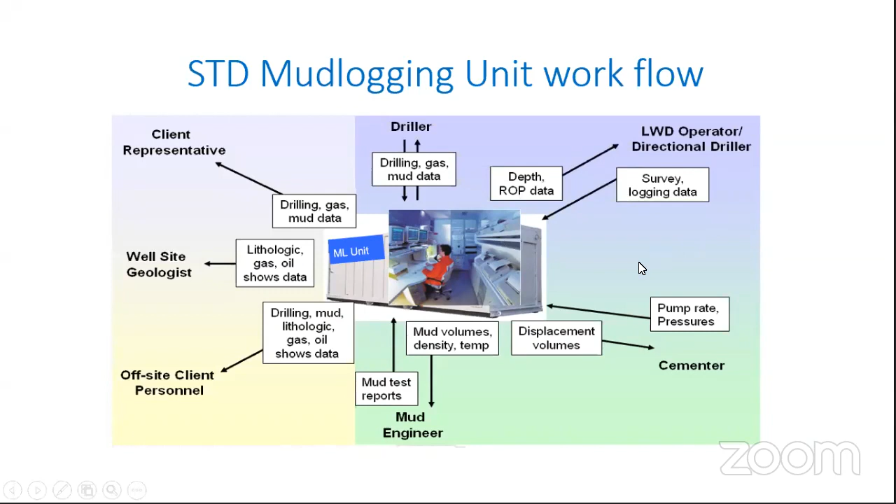Another one, as I mentioned, this is just a diagram. This is the mud logging unit. Mud logging basically deals with all the service hands, all the departments at the rig site. There's usually a client representative, the company man, and the geologist. Then on the rig floor, the driller, MWD, LWD, and so on. This is where the recording of data happens, like the control room. You can say this is the NASA of the rig site.

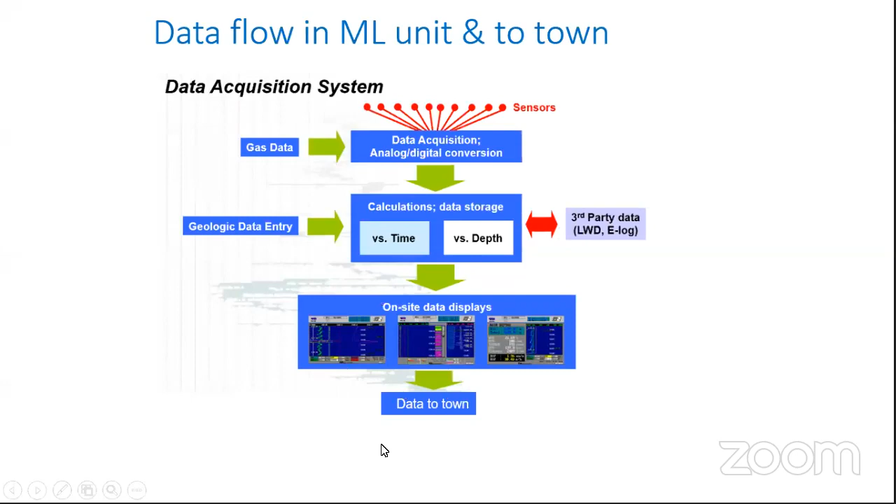Again, this is just an example of how the acquisition system works. Many sensors are there, the gas data is there, the entry and analysis entry, and these displays are there. Then there's import of the LWD data from the LWD guys and vice versa, and finally the logs or data can be transmitted to town.

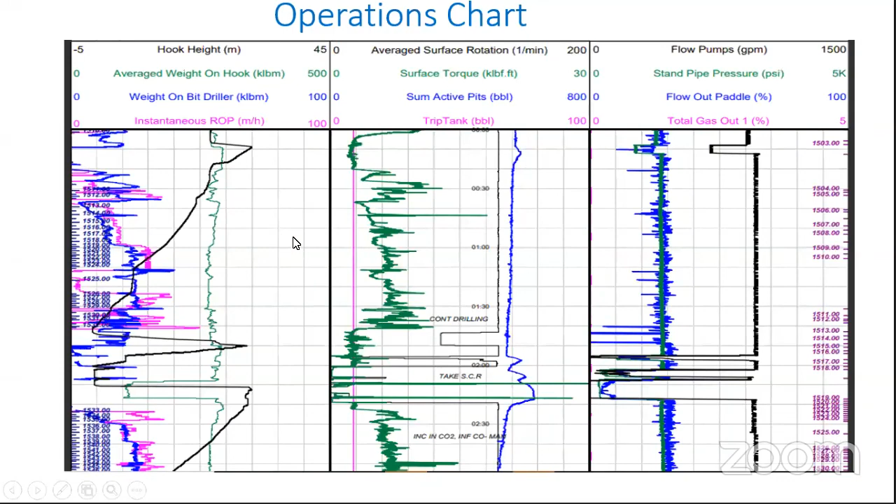You can say, for example, how many minutes did the driller take to make a connection. Was there any problem, all the parameters - this is in brief, all these logs, this non-editable chart, which is very, very important and very reliable. Still, this is the basic. So why do we think, or why do we say that mud logging is important?

I'm sure most of you must have seen the movie Deepwater Horizon. So this incident: what happened is that this was the Transocean rig named Deepwater Horizon, and it was drilling a well in the Gulf of Mexico. It was in 2010 that it had a blowout. Can you imagine this? This incident changed the oil and gas regulations to a big, big uncertainty.

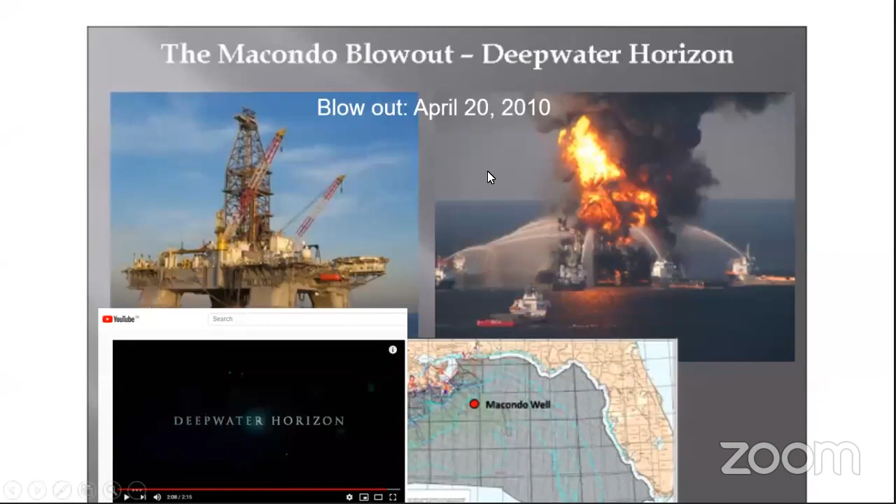So why, what happened? I am sure you must have read it, and you must have seen the movie also. If not, there is a full report on this one. You can download it. It's 126 pages.

One small example I would like to pull out from this is that during the investigation, it was found and concluded that there was a simultaneous operation of mud transfer and other operations. At 1:28 p.m. on 20th of April, the mud loggers told the driller that because of this simultaneous operation, they had difficulty monitoring the pits. So the assistant driller told the mud logger that once the offloading operation ceased, a notice would be provided, which was not actually done in the latter part.

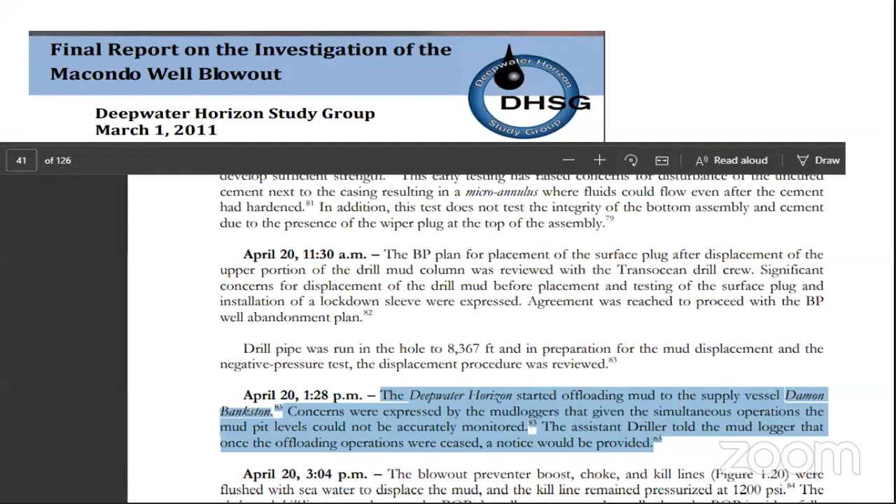So this is just an example of how communication is very, very important - first of all. Second thing is very close monitoring. I'm not saying this was the only reason; there were multiple reasons, but this was also one of the important findings - how important and crucial it is in monitoring a well. And you know the consequences in terms of BP, Transocean, and the environment, and the concern to the world.

So now coming to the advanced application - it will be very difficult to cover all, but here I'm going to pick three cases, only three cases, by using the advanced application, of how we can optimize operation, how important it is. So the first one, I have selected an SPE case.

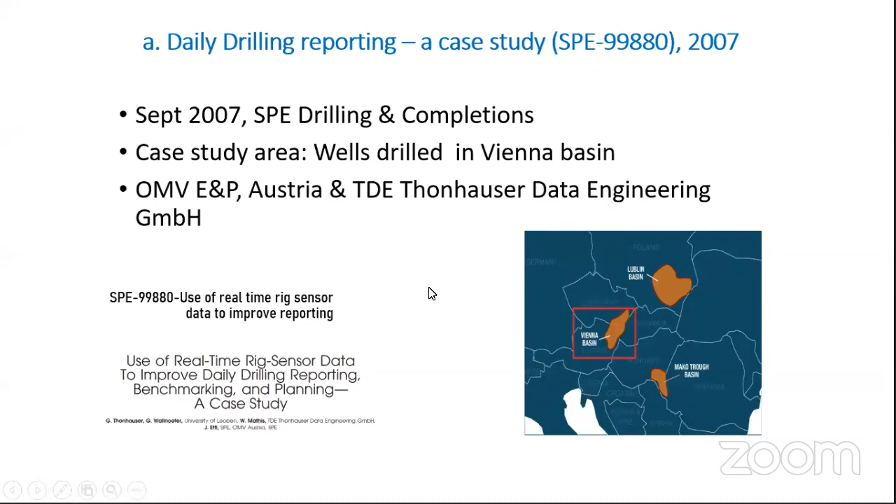This is SPE. Some drilling guys took some wells in the Vienna basin. They did some survey, some studies. So what happened is, if you see the timeline of a well as it's recorded - this is the theoretical. And when we talk about lost time, there are some downtimes as we go with the operations, and there are some lost times, but there are some invisible lost times.

So what happens is, once a well is drilled in a particular block, and after a few years down the line, if the drilling engineers or geologists want to refer to a well to plan another one, they need to see that data. At that time - I'm talking about 2007 or so - it was very difficult to find, and it took days and months and a lot of time because it was not readily available, not easy to refer to, and was not very accurate. I will not go into the very detail, but this is just to give you an idea: what is this invisible lost time, and how can we rectify this?

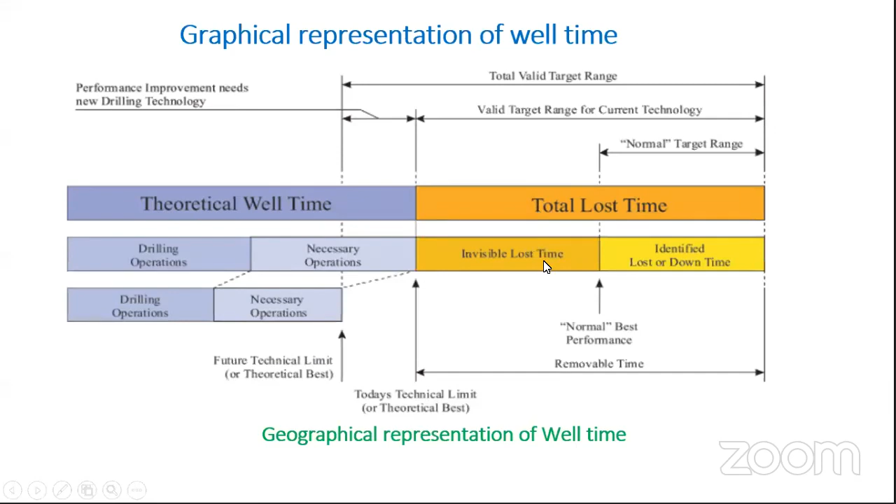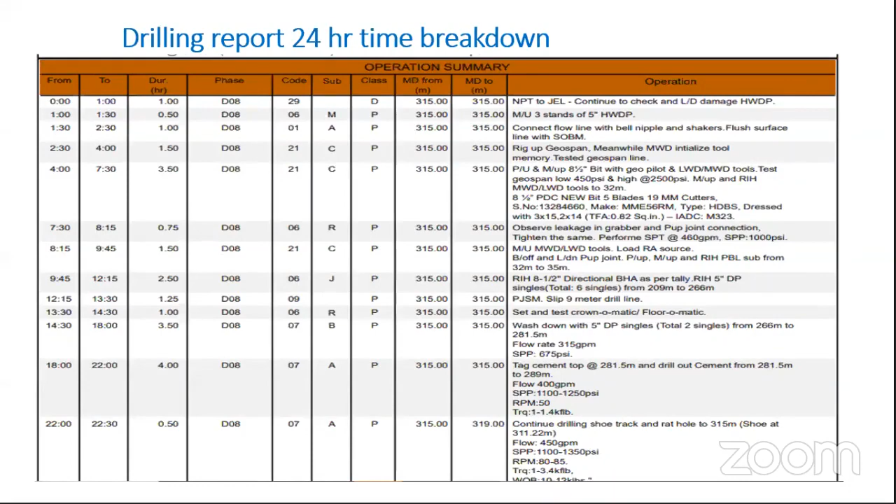For example, the driller finishes an operation, let's say at 10:10. He will not write 10:10 - he will write 10:15, or sometimes 10 o'clock. So if you think about a well drilled over a few months, the error will be very, very much, right? This is one thing which is still practiced today.

Then, what these guys did - this is the real example of the Vienna case - is they started this automated operation recognition system. And I think now many of the logging companies have already applied and implemented this.

From the signals, that is from the traces, the system can identify whether it is drilling, whether it is reaming, whether it is just circulation, from the different parameters which are required to call it drilling.

For example, for drilling, the bit depth has to be at the bottom. So like that, we'll not go into the details. So this is how it is.

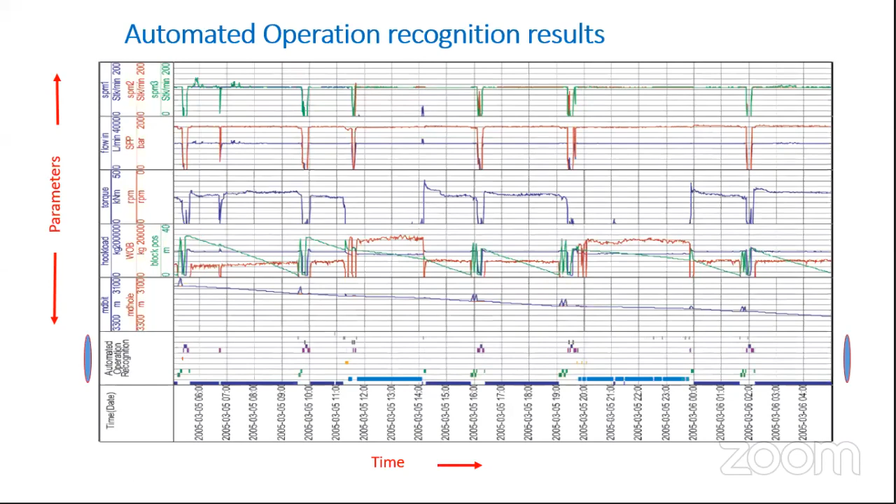It started taking into serious consideration that something has to be done so that all this will be correctly recorded, and then the data will be able to be digitized and used at the same time for future reference. So after that, drilling engineers prepare this at the end of the well.

So if you prepare it based on that 15 minutes, 15 minutes, how much do you think will be the accuracy of this? No doubt they are preparing it, but then what will be the accuracy of it?

So if you prepare from the system generated, which many companies, some companies are doing that. I'm not saying all, but some companies are already doing that.

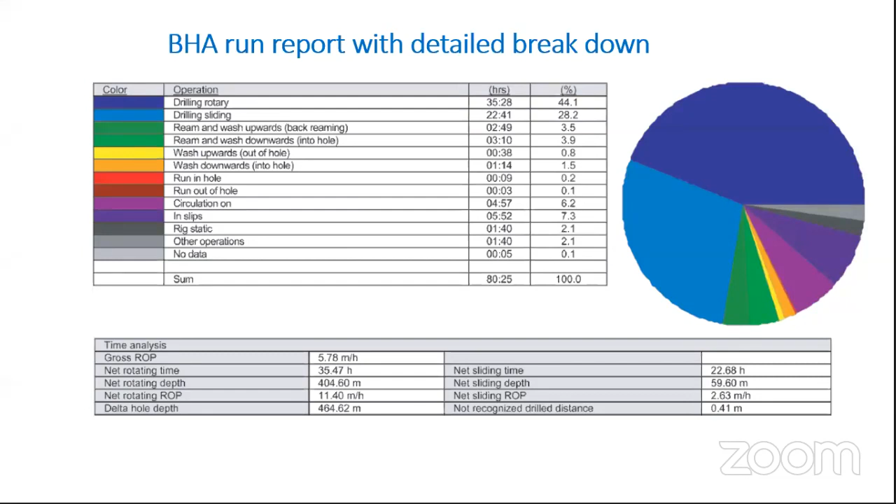So you can say the accuracy is much more in such cases if you use the traces. Of course, it has to be with good calibration. All the parameters have to be QC'd and so on.

So benchmarking is what the guys in Vienna did. After that, you can check so many wells. They did it, I think, around 15, 16 wells, and then they came up with the benchmarking. Then they could do the KPI and so on.

So it helps to improve the efficiency, and overall, at the end, it's cost saving. So this is one example which I wanted to give about this, about how automation will help rather than using the traditional way of reporting the drilling everyday report.

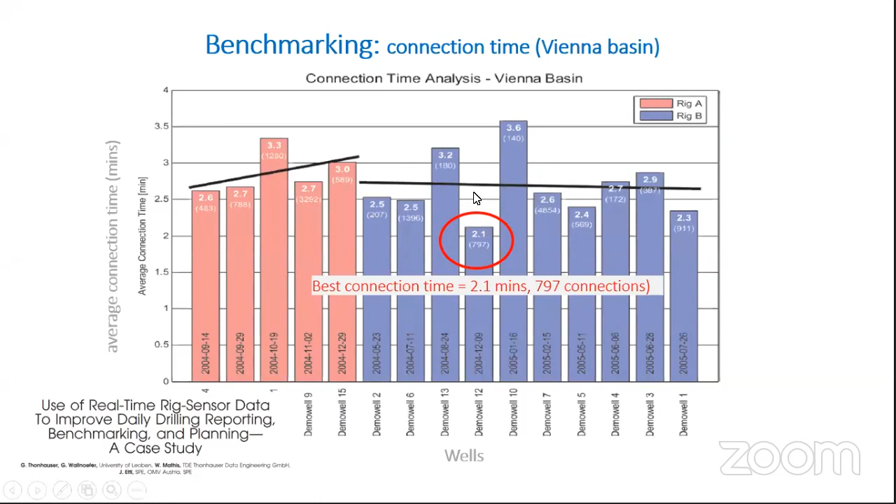So the second one I'm picking up is about the plot of LOT, leak off test, or the FIT, formation integrity test. I will not go into the very detail. The thing which I wanted to highlight is until today, many drilling supervisors, many companies are still using this very, very old way of plotting in Excel.

So you can see here how much volume has been pumped, and what was the pressure, surface pressure. I'm not saying again it is manipulation, but there can be so many human errors. This is still there, which can be improved.

Let's see this one. Okay, I was in this well as well as in this one. So as I have said, I am going to pick up three examples. One is from the SPE, one is from...

...the well I worked on. So before the LOT, what we used to do, by the way, this was for a well in the Gulf of Mexico. This was for Chevron, and I was in the Chevron office. So we used to monitor this in real time. In real time, when the operation was going on, we had 24/7 coverage. At night, we were monitoring from our office, and during that time we were in the Chevron Houston office. So as the operation was going on, we had to submit this report within an hour.

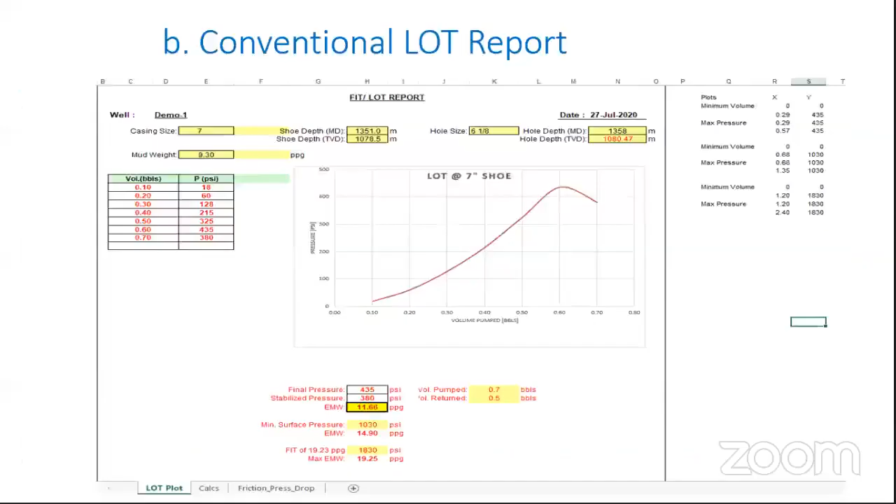Otherwise, they can get it through other methods also and plot the same. So what I'm trying to say is, the above plot, with a little more effort, the mud logging crew also can plot this.

So here I'm not going to talk about the contract, but you can see the difference in the quality of these two plots, the reliability, and different sensors. It doesn't mean that it will be the same number.

For example, in this case, we recorded 1202 psi. The company man reported 1207. It's just 5 psi different, which is okay. It does not have to be necessarily exactly the same with the company man. Of course, to avoid confusion, we do not follow too many. But then whoever reads this chart, they will be able to understand that these are based on different sensors probably, and then the recording. But the reliability is there.

So nobody can finger in this data. So this is what I was trying to say, emphasize at the second point: how this advanced application can help in getting the real value of the LOT or the FIT when done.

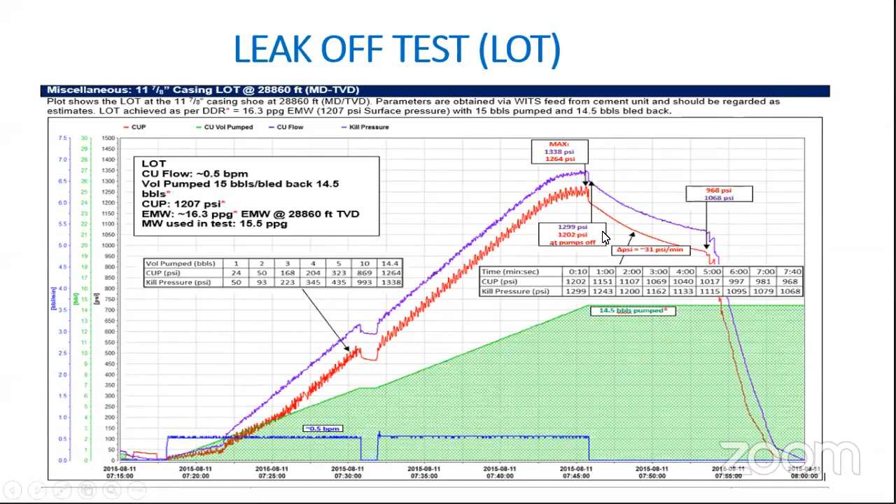The third point I'm going to pick up is about torque and drag. So while tripping, while maybe running in hole or pulling out or doing drilling, this is also one example where I was there myself. This was in one of the wells in Malaysia.

Oh my God, you see the parameters that the driller is doing. He's taking so many parameters, and you can see below. I'll show you the chart in the next slide. There are so many.

So from here, what is he able to see? What does he know actually? He cannot interpret this. There's no time. He's so busy on the rig floor and so many parameters to take. And still, this is being practiced.

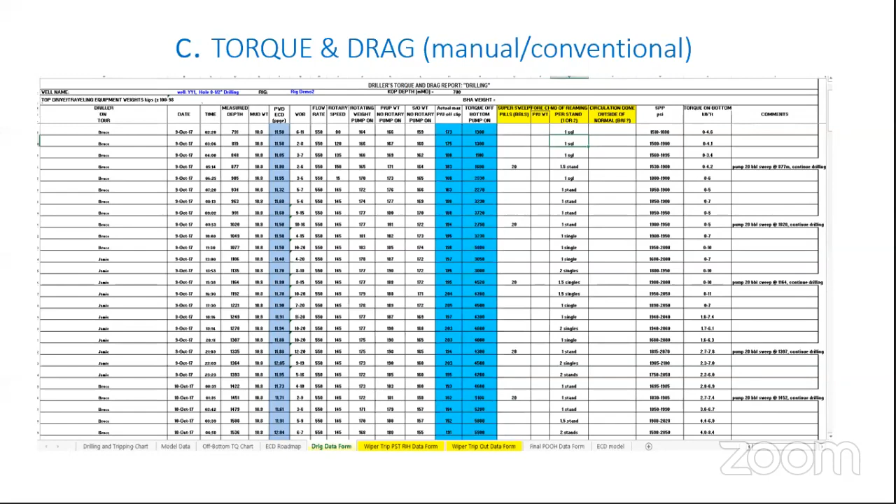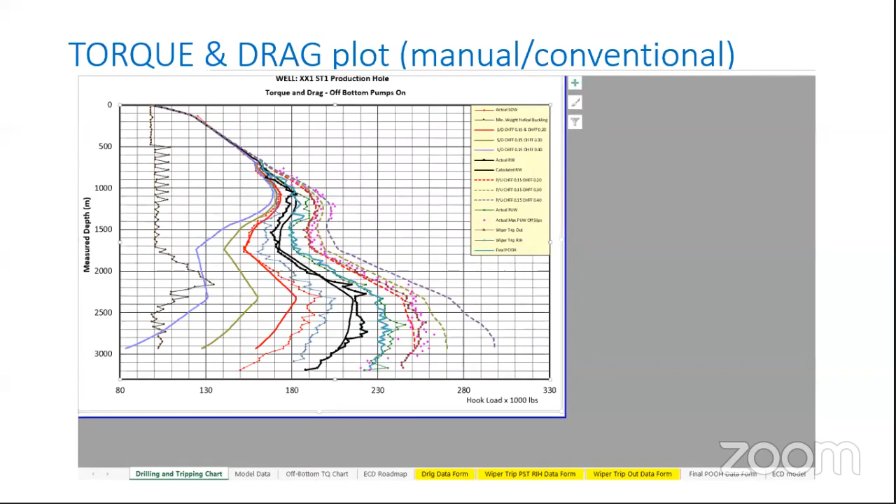The guy is, after plotting, this is one example. You get so many plots, everything in one. Of course, you can separate this into different operations, running in or pulling out of hole. So this is manually done by the basic mud logging crew or by the drilling, or even by the company man.

Before this, we will not go into the details, but the model has to be prepared. The friction factor has to be discussed, seen while running it, and validated. So with this, you will have a very good view, and the speed is there.

The best part is that no data is entered manually. That is the difference. No data is entered manually. So it gives you a very good picture. And you can zoom in, out, and do a lot of analysis.

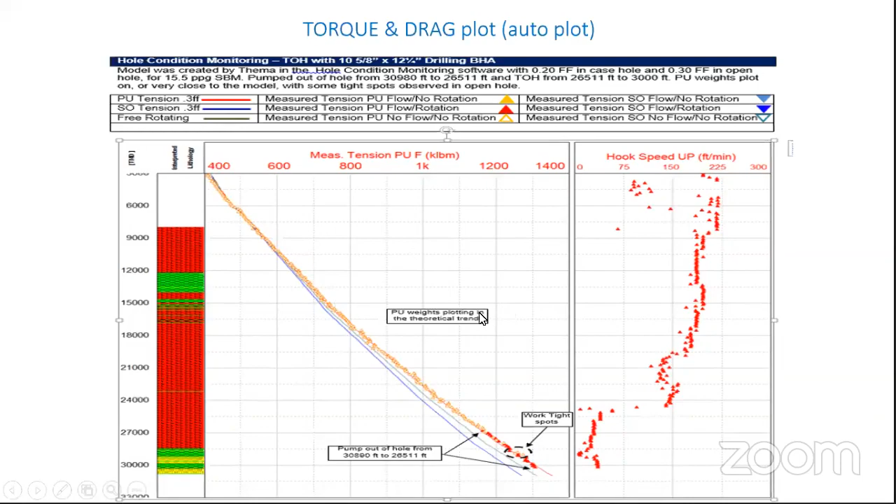For example, you see here, wherever there is a tight spot, instead of saying - and practically, we have seen when we pull out, we got like 40 kilopounds - okay, let us report only up to 30. I'm saying too much, but this is the reality happening.

So if we send a report like this, if something is wrong, before it is too late, there is time to look into it by the drilling guys in town. Oh, the hole is really in bad shape - okay, so there is time to look into it. All this is possible if we make proper use of this advanced system.

The sensor is the same sensor which will pick the same traces or signals, but it's the way it is being analyzed. Before we go into stuck pipe and losing the well, how many wells are still being lost because of negligence or lack of close monitoring or analysis. Some are still following the old, cowboy style of drilling or operation. Today the technology has changed, and it's time we have to look into it.

But of course, there are some companies doing it by interacting with them. Many a time it goes to town only, and not many people refer to the reports. Decisions are taken at the well site without much looking into it. I'm just giving an example, but this can still be improved by using this technology. So this was a very brief three cases I picked up from the drilling point of view or the monitoring point of view.

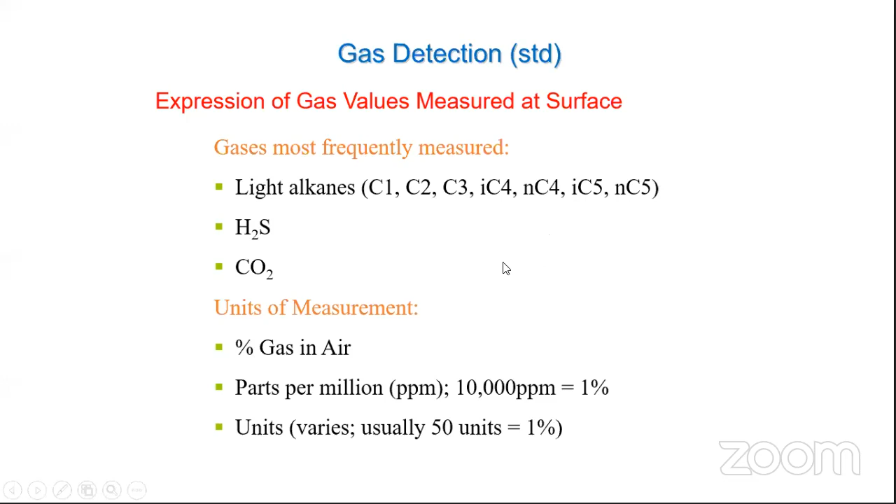But like I said, this is just another point, but you don't have to remember all this. There's no application for it anywhere - you just need to know from C1. When we say C1, this is CH4 actually, this is the alkane, a single bond - methane, ethane, and propane.

C4 is butane, has iso and normal, and the same thing with pentane, iso and normal. All the calibration gases come with exactly what's there, known ppm - you just have to use that one. There's nowhere you're going to describe all this.

So that's easy. Another important thing - not everyone is fully aware of the types of gas. It's very important that when we drill, when gas is produced and detected, whatever reading is coming, we need to understand it from the plot. Of course it's not very easy for beginners, but we need to understand that, because there are some critical types which we have to be very careful about - for example, the connection gas. It's very important, I'll briefly go through it as you can read yourself also.

Liberated gas means when we're drilling a hydrocarbon bearing formation, if there is a gas trap in that reservoir, it will be naturally liberated. That means it will come out with the cutting, and the drilling fluid or mud will bring it to the surface. That is what we call liberated gas, meaning it is coming from the cuttings of the virgin rock drilled.

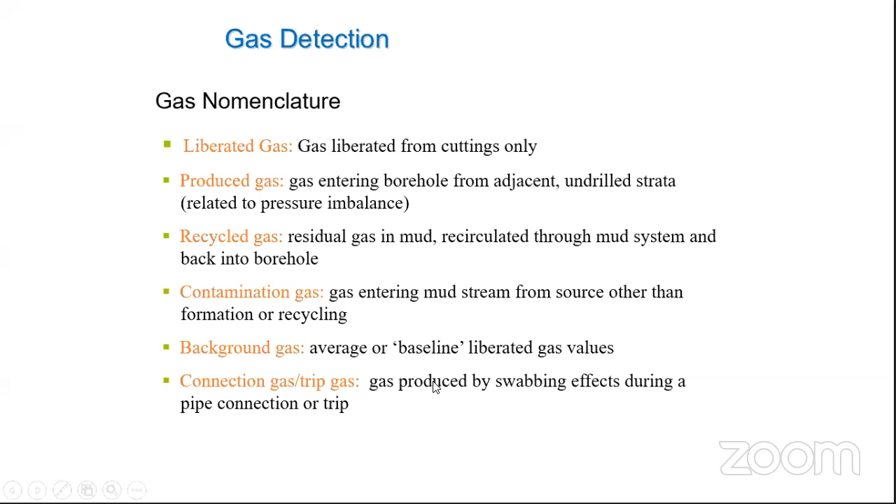Connection gas happens when the formation pressure is slightly more than the hydrostatic pressure. There is one signal we have to be careful of, and this is also because of the swabbing effect. Connection gas is very important for mud logging and geologists to monitor. If it happens and keeps increasing, it gives you a signal to check your mud weight, check your ECDs, and so on. Knowing all these terms will help in managing and identifying the gas.

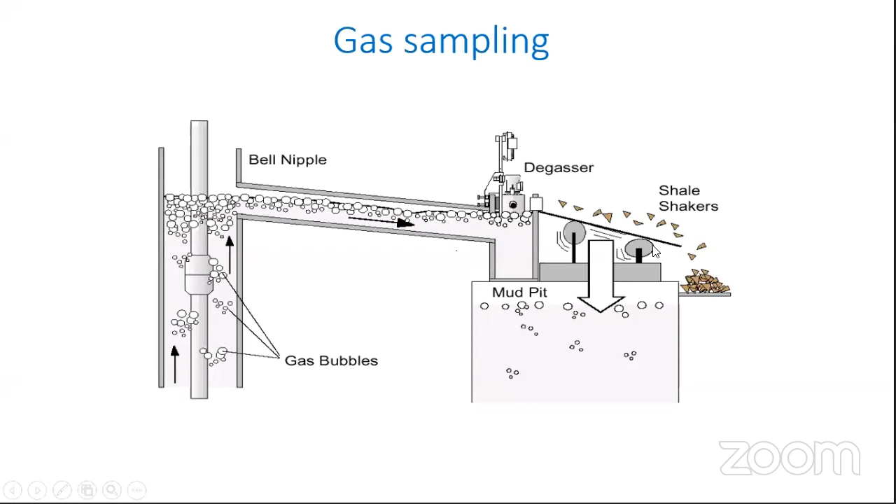Another very important thing - when we say a percentage of total gas, maybe 5%, 10%, 1%, 2%, that doesn't mean anything by itself. What we need to see is what size of cuttings it's coming from. There are many factors - in this case it's the same gas, but a bigger hole size, even with the same formation, means if more volume is drilled, more gas is liberated. It's a very simple example.

Smaller hole size, with the same formation, means we are expecting less gas. Why? Because we are drilling less rock volume. This is a very simple but important example: the same amount of gas per unit volume of rock, but different bit size can change the total gas reading. As you see here, going from 17.5 to 6 inch, see how it comes down.

Another factor is the flow rate. If you dilute it in a higher volume, the gas reading will definitely be less. So increasing the mud flow rate decreases the gas recorded, because increasing the flow rate means you are diluting it with more volume.

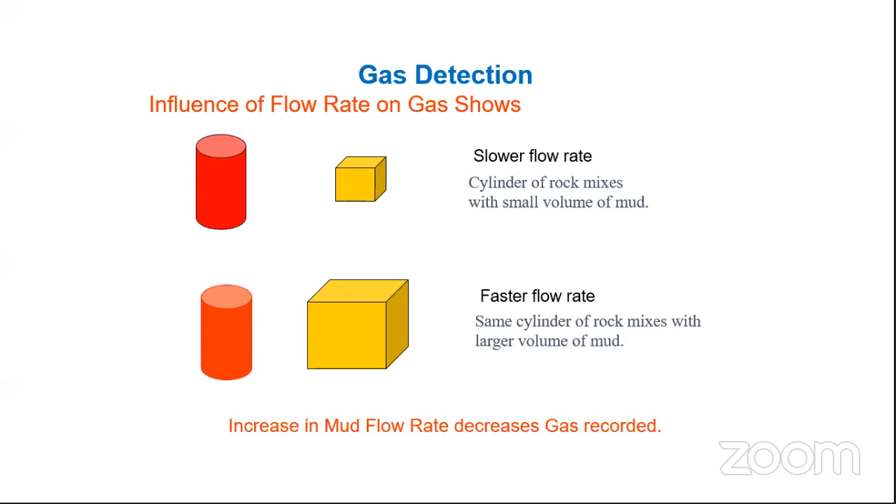This one is about gas only. I'm using this from a Schlumberger website, you can download it. When isotope logging started, I was in Malaysia, and at that time it was Geo Services. It was a very good project, a field trial actually, I think sometime in 2009. It was a field trial, and it was very good, so it is published there.

I will show you another one - you can have all this isotope logging. Now many companies are doing that, Geolog is doing it, and I don't know about other companies, but they're doing that too. The main point is that traditionally mud logging guys used to collect the isotube gas samples. What happens is it was collected during some interval, or at the gas peaks, or as per the requirement.

For example, if you see on the left hand side, this question mark - this was the depth collected, maybe 1,000 meters, then the next one was 1,100 or 1,200, and so on. So what happens in between? Nobody knows that.

With this isotope logging, which is continuous, you see on the right hand side how it varies. These points were from the field trial, where isotope samples were taken, isotope logging was going on, and the data was compiled later. When the first result came, I went to see the Shell geochemist guy, and he was very happy. He did not tell me all the details, but showed me this plot, and I could see the difference. This is how we started.

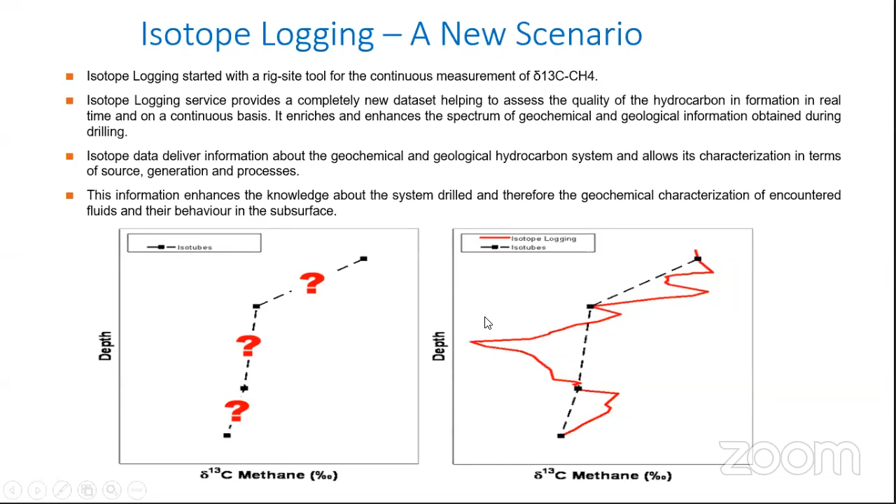Next one is the advanced gas detector. This is also from the Schlumberger website, which I downloaded as a courtesy - you can get it too. What I'm trying to show here is the difference between the advanced gas system and the standard or basic gas system, let it be any company. So what is the difference?

This is very basic, but I'm just trying to show you the difference. When we are drilling at deep water, which is very deep, for example Gulf of Mexico, a deep well, and it's so cold, by the time the gas comes to the surface the temperature is so low that the gas will not be able to liberate properly. So you will have a false reading, although in the formation downhole, it is there.

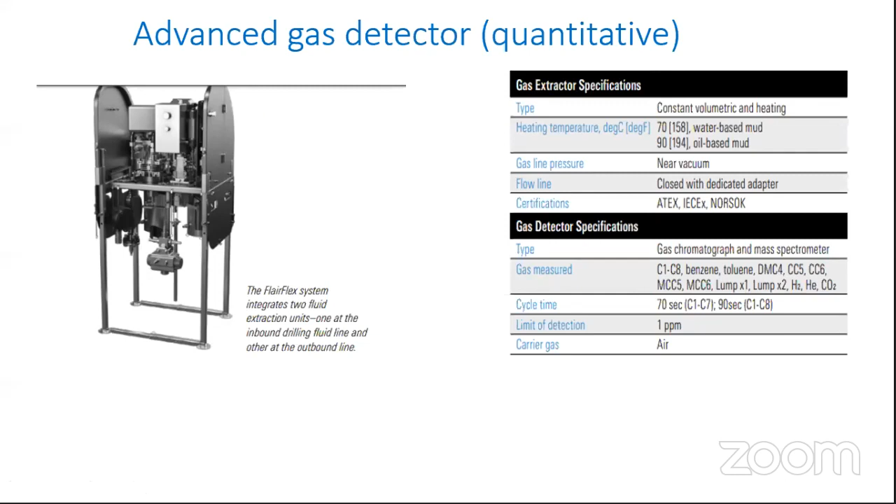Then another one is the cycle. Then another one is the composition - the standard ones go from C1 to C5, but this one is from C1 to C8, plus it can also detect other types like H2S, and there are other more parameters. In this case, this company uses mass spectrometer, and the standard one, most companies use FID technology - flame ionization. I think that's all about it.

We are almost an hour now.

So just to summarize again, what we did today is a little bit about the brief mud logging, the basic mud logging - what is mud logging, how is the data acquisition system, then what is the importance of monitoring the well. Then we picked up three examples: one SPE paper on this automation, the way drilling report is still being practiced today, and what are the chances of error it can give for future reference, for benchmarking.

So the accuracy being like 15 minutes is the minimum split up, as we all know. So what can be done to look into it so you can have the real value of the data for your analysis in different ways.

The second one we picked up is about the way torque and drag model parameters are being taken in a very traditional way, manually feeding the data and then manually plotting - confusion, and the interpretation is too late, so by the time you're stuck. And then hole cleaning issues, for example whether the hole is really clean or not, and many other things - so that was the one.

And the third one was on the LOT, or the FIT, how the plots are being plotted manually still, and the chances of human error, if not manipulated. So we talked about these three main concerns. There are many more like this, like the early kick detection system, the hole cleaning, the cutting flow meter, and there are many more things where mud logging can give real value with little more addition.